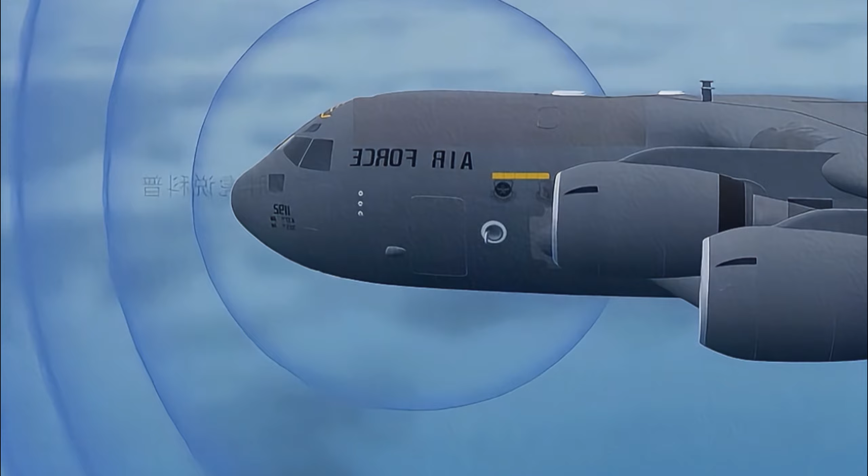Call it the sound barrier. This is because the plane causes a shock in the air that spreads in all directions, forming sound waves, the maximum speed at which air waves can be transmitted. As the speed continues to increase, the air doesn't have time to spread and is squashed by the plane.

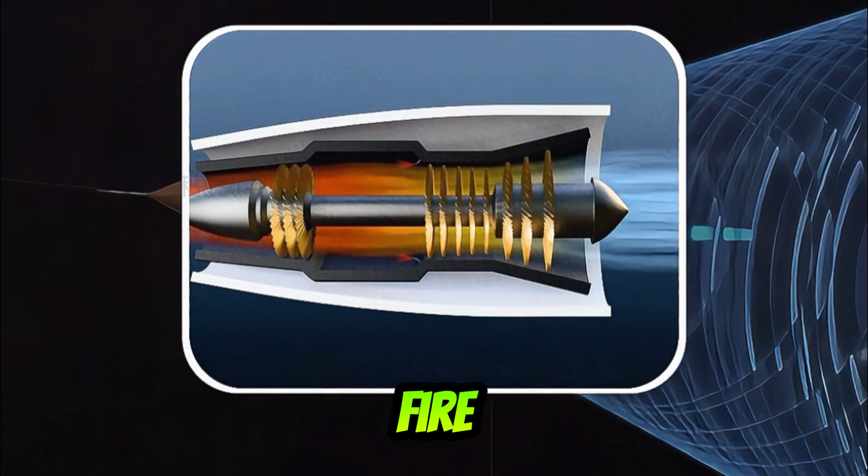In fact, even after improving the aerodynamic shape of the aircraft, there was still a lack of sufficient power to exceed the speed of sound. Exceeding the speed of sound, air and fuel mix in less than 1/1000 of a second, like matches in a typhoon, easy to go out. But with the continuous improvement of the engine, engineers discovered that the sound barrier could not only be broken, but it also brought an unexpected benefit.

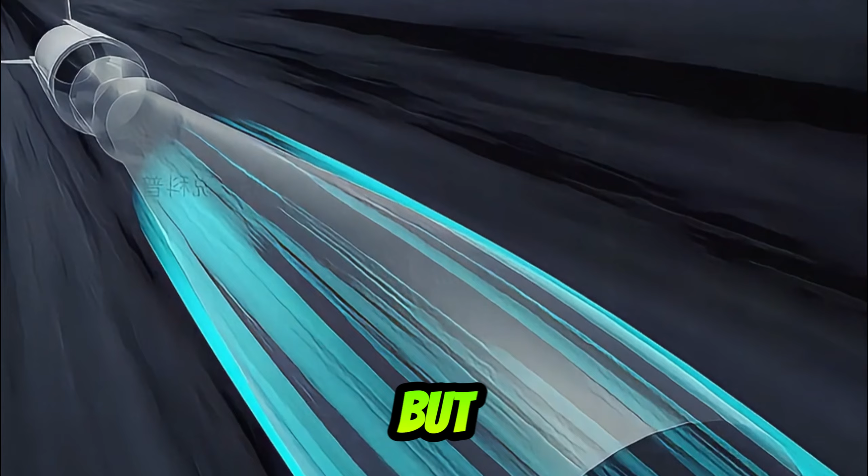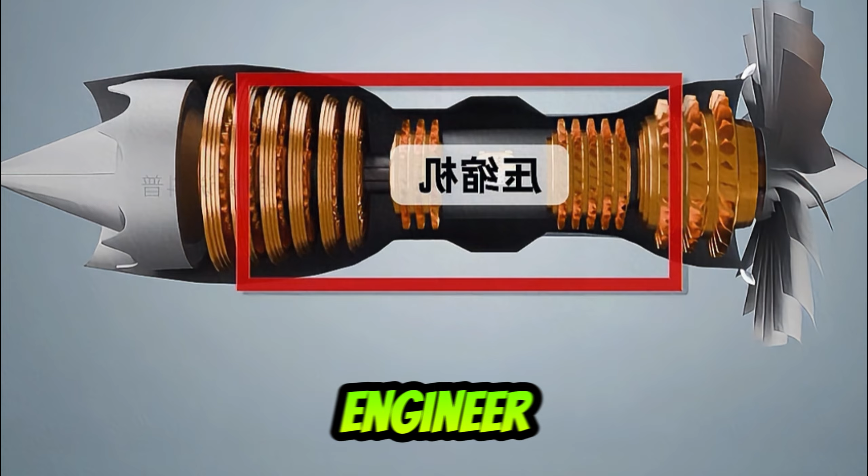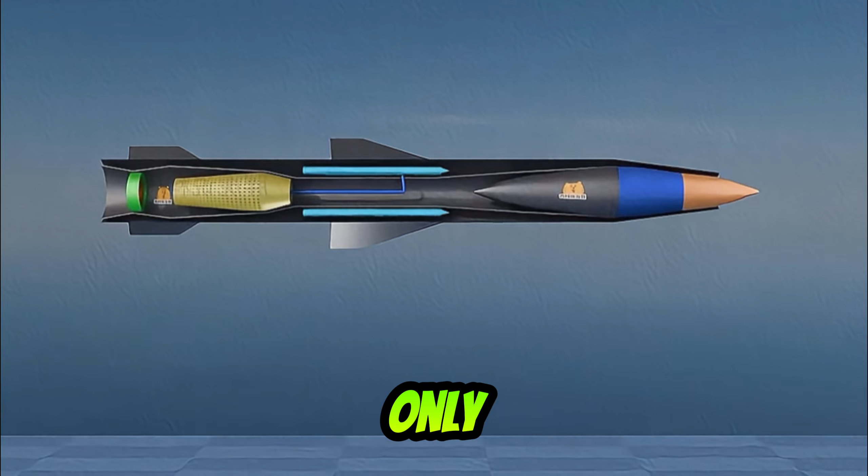The air is compressed by the impact of the plane. The role of the compressor in a turbine engine is exactly the same, and this is more efficient. So the engineers simply removed the compressor from the engine, and removed the turbine that drives the compressor, pumping the air entirely using the plane's own power. This ramjet has only a simple structure left: air inlet, fuel tank, combustion chamber. There is a flame stabilizer in the combustion chamber, fuel injector, igniter, and variable nozzle.

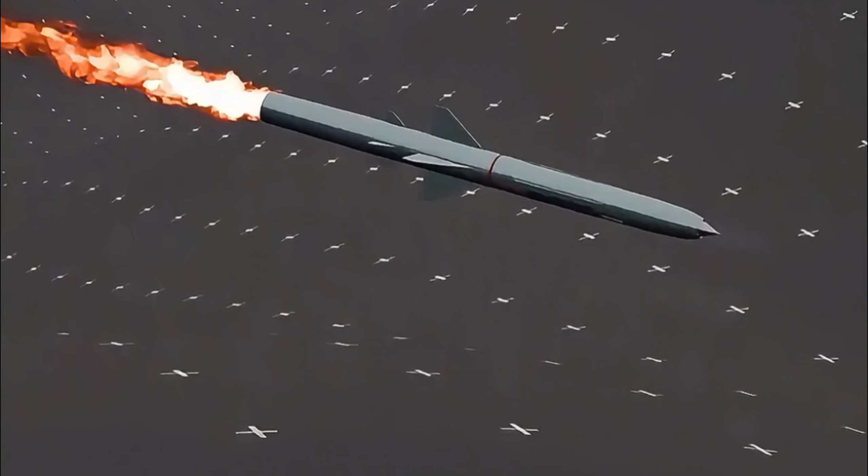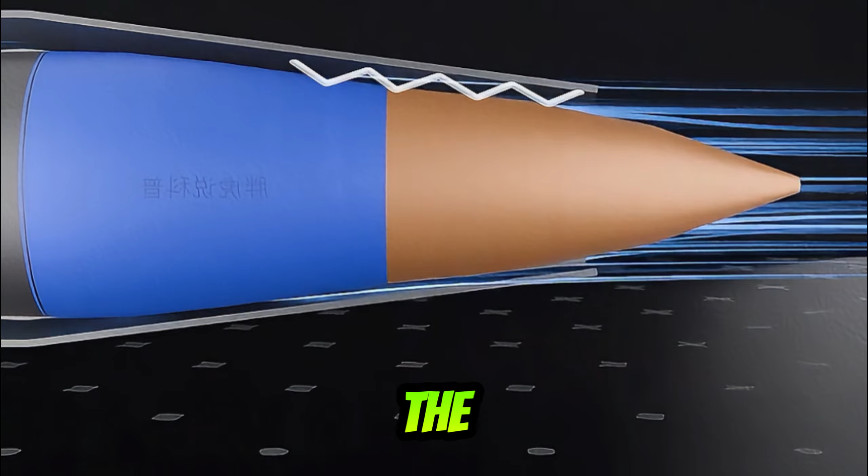When the plane reaches Mach 1.5, that's 1.5 times the speed of sound, start the ramjet. Low pressure cold air passes through the air inlet, with continuous reflection on the air intake wall. Its speed drops to subsonic, then it is compressed, obtaining high temperature and high pressure. Then it enters the combustion chamber, mixed with atomized fuel.

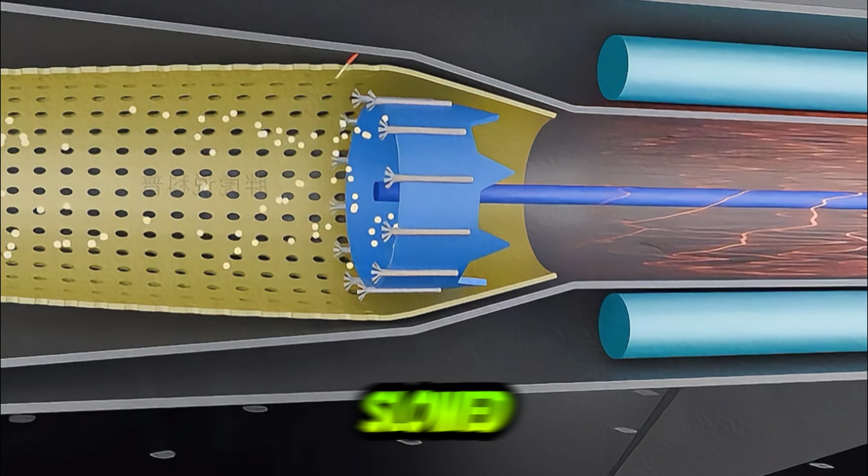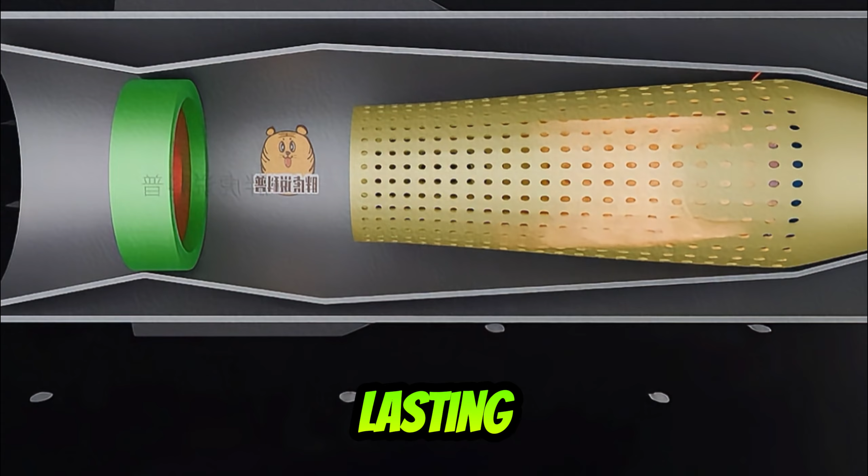Since the airspeed has slowed down, plus the flame stabilizer, it is easily ignited by igniters and becomes a high temperature and high pressure gas, generating a lot of kinetic energy. The engine gains a strong and lasting source of power. The flame then enters the nozzle. The shape of the nozzle is to converge before diverging. The converging part accelerates the air further, and then it is ejected from the rear of the engine, giving the plane more speed.

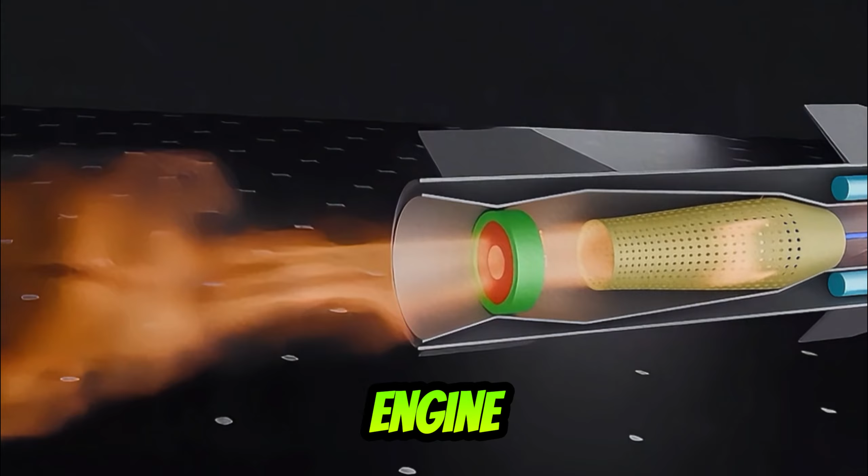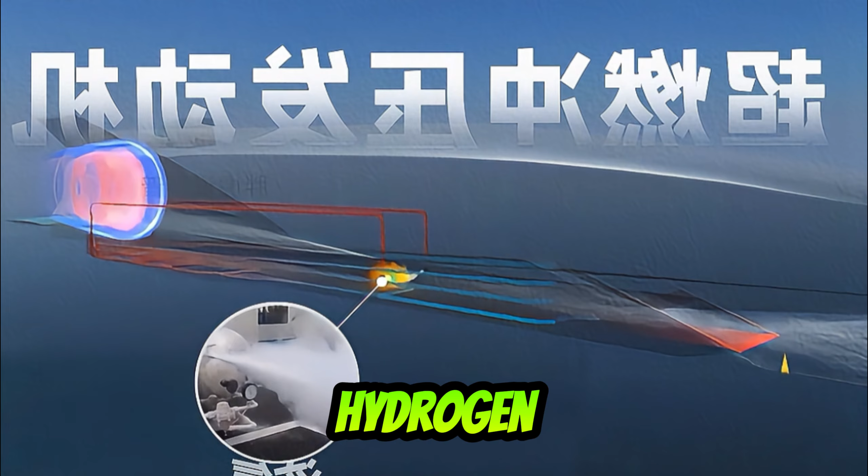The faster the plane, the better the ramming effect. The more power the engine has, and the more powerful the engine, the faster the plane. That's it. The speed of the plane can be increased all the way to Mach 6 using a scramjet. With further improvement of the combustion structure, and replacing the fuel with liquid hydrogen, in theory, the scramjet can reach Mach 15. Of course, the scramjet starts at a higher speed, requiring Mach 5 or more. Anyway, that's how the ramjet works, pushing speed from one peak to the next.